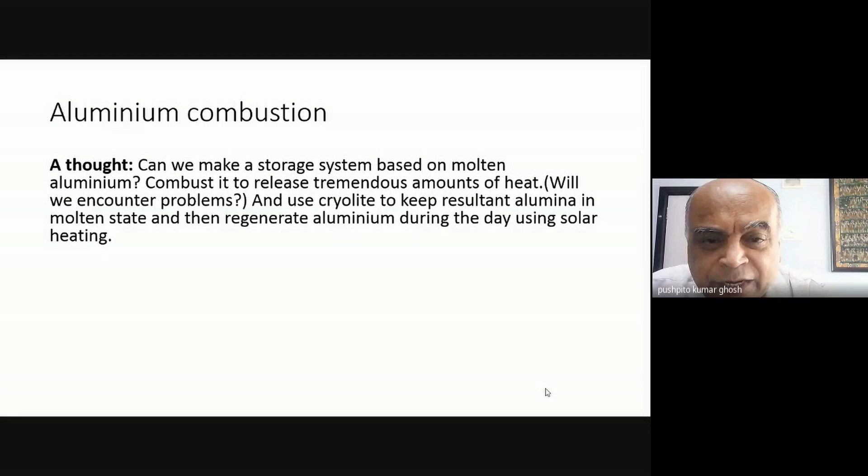So what I was doing was looking at this, you have seen this, this is the Hall Heroult process. And what are we making? We are converting alumina to aluminium.

At the same time, one interesting thing to consider is that in the future, one of the big problems will be that it requires a lot of energy. And so at some point, that energy is going to come from some other source. Maybe nuclear energy, maybe nuclear fusion, maybe solar thermal energy is possible. So there should be a concern about where this energy is going to come from, and not just for this. Across all of chemical technology, many processes are energy intensive, and where will this come from, and what role does a chemical engineer have in this entire debate on net zero, which people are talking about? Where do we all fit in? So I think that's important for you to know.

And second, if for example one is talking about solar energy, and not just solar but in many other cases, what we also have to look at is this whole business of being able to store energy, because you may not be able to utilize all the energy only during when it is being generated. Energy has to be stored. In a thermal power plant, of course there's no issue because you are constantly burning coal and generating power. But if you are working with, say, solar energy, you may be able to reach very high temperatures and carry out chemical processes. All that is fine, but one will have to look at storage.

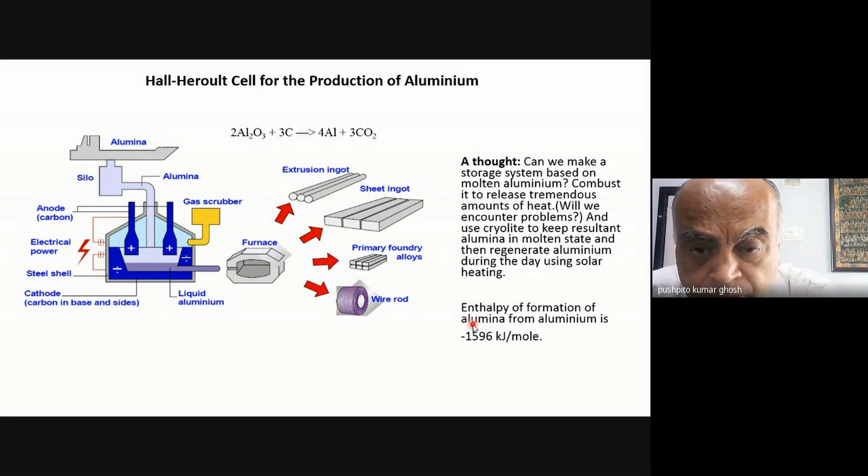This is just a wild thought, but the reason I'm sharing it is that you should always think about whatever you're learning, and where you can possibly apply it additionally. So keep this in mind, and later on, when we cover ammonia, you'll find something similar which we'll be discussing.

Now, what we'll do is discuss air, meaning separation of air. Air and water are two very, very important utilities which one requires.

Many times we take air for granted, but air is really not to be taken for granted. It's very important, so let us try and see what kind of things you have in air. Mainly, as you know, roughly about 4/5 is nitrogen and 1 part is oxygen. But air also has a fair amount of argon, something like 1%, and argon is a very important gas in its own right. There are, of course, small amounts of other things also.

This one is steadily going up - the carbon dioxide in the atmosphere. Today, as you know, it's about close to 412 ppm by volume, and it might go up further. So we have actually already crossed these limits.

But it's possible that later on you may actually want to recover carbon dioxide from the atmosphere. All this net zero is about the fact that if you are going to produce carbon dioxide, you must also find a way of taking it out - either through planting more trees and mopping up more CO2, which is frankly the easiest thing to do, or there could be certain technologies with which you can try and extract carbon dioxide from the atmosphere, to try and contain the temperature rise to 1.5 degrees centigrade, which is what everybody is talking about. So carbon dioxide from the atmosphere could become a feedstock in the future.

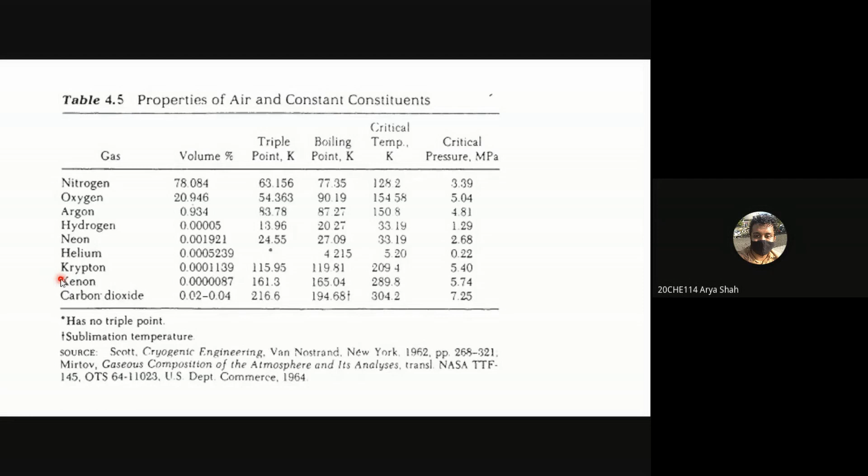So one more contribution to the hydrocarbons can be the vaporization that takes place at the pumps - like even for a minute amount of time that we keep our tanks open to fill the petrol or gasoline. Yeah, in fact, vaporization, it's a very good point.

Vaporization is an important point, but the biggest contributor to hydrocarbons is, of course, the fact that combustion is not 100% complete, and second, which you'll find a lot of times, you'll see these diesel fumes, and if the engine is not properly tuned, you see the amount of smoke and all that comes out - a lot of unburnt hydrocarbon.

But another source is actually cattle. I don't know if you know, but cattle are responsible for a huge amount of methane generation, and that methane really escapes. In fact, there's a lot of work in trying to reduce methane emission from cattle.

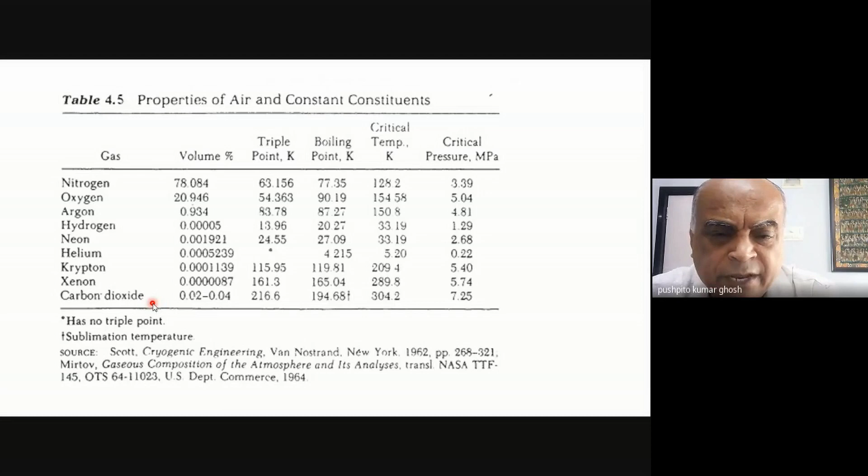I don't want to go into all those aspects, but just to basically say that there are complexities today which did not exist 300, 400 years back, and air is much more complex than what is shown in this chart.

Now, the other thing is that if you look at air, especially from a chemical engineer's point of view and in manufacturing, one doesn't realize the amount of air that we actually consume. For sulfuric acid, you require about 2.8 tons of air per ton of sulfuric acid. 1 ton of coal that we burn takes about 10 to 11 tons of air. The reason is because only 20% is oxygen.

So you're talking about something like 2 tons, and that will be about it. Now, 1 ton of coal will require about 2 tons of oxygen because you have CO2, right? And their atomic weights are comparable - oxygen is 16 and carbon is 12. So you can quickly do a mental sum, and you'll be able to figure out that these figures are all reliable. So it's a lot of oxygen, and in terms of air, and that's not all.

We don't take into account the fact that we are 1.3 billion people, maybe 1.4 now. Can you imagine everybody consuming food, breathing in oxygen and breathing out carbon dioxide? How much carbon dioxide is actually going into the atmosphere from us? And for each human being, count the number of other animals that exist on the planet, and they are all emitting CO2. So it's not just chemicals manufactured, but us. You can look at the calorific value of food, and obviously it will be an approximation, but you'll get an idea within maybe plus minus 30% of how much oxygen would have got depleted and how much carbon dioxide would have been produced from us.

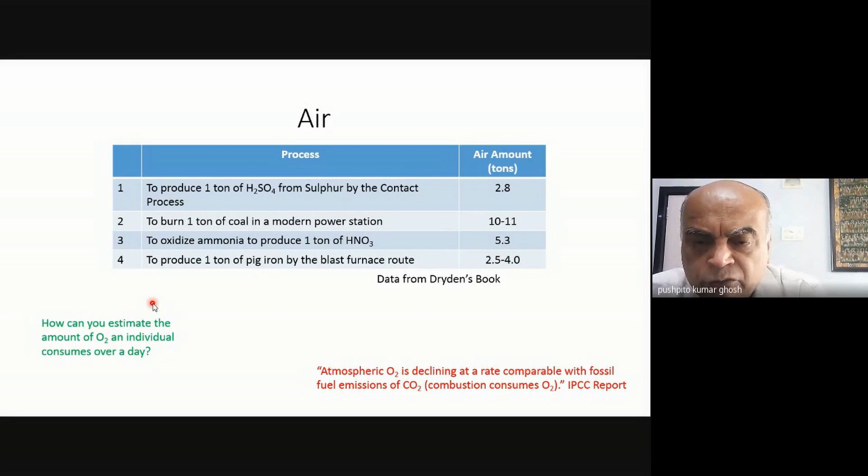Now, what we will be looking at over the next couple of lectures is the separation of air into oxygen, nitrogen, and argon. Why? Because many applications actually require pure oxygen, so you'll have to look at that. There's a lot of requirement of pure nitrogen, and a lot of requirement of pure oxygen.

But then you can imagine that if you've got a lot of unburnt hydrocarbon in the atmosphere, and if something happens, like if I produce pure oxygen, liquid oxygen, and a lot of the hydrocarbon in the atmosphere dissolves in that oxygen, there could be an explosion. There's a lot of things that you need to look at, and I'm just trying to point out a few things which are rather obvious.

And then, many times we know that if you are using air and there are impurities like SOx and NOx, which can make the medium where you're carrying out a reaction acidic, there could be problems. So again, they have to be removed. And then we also know that there are many applications where you actually require dry air, not just wet air. So the moisture content in air is also very critical for many applications. These are all the things that one needs to keep in mind.

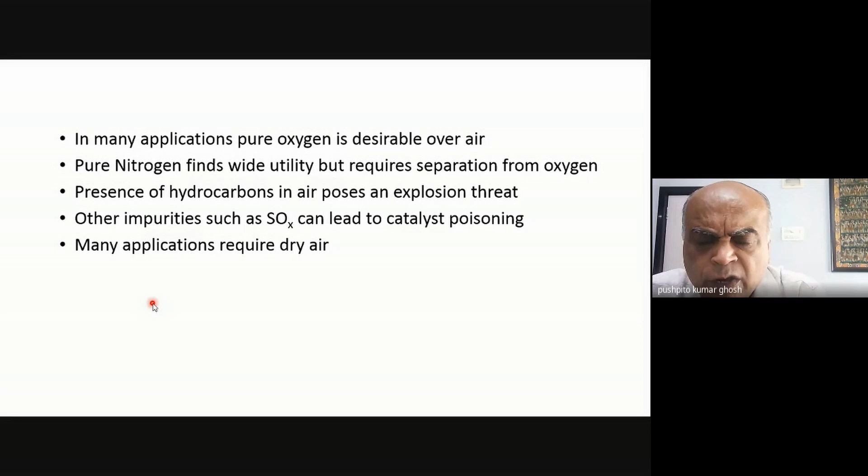Now, let us look at oxygen first. We know oxygen has a lot of applications. There was a time, when people were discovering oxygen, and the great work of Lavoisier, that oxygen was being used for combustion, and finally all the oxygen in the air got consumed, and they didn't know, and they would call it burnt air - that is, it's exhausted of its vitality, and it's burnt air. That was the term that was used after combustion.

Where would one need pure oxygen? Which are the applications? Sir, in steel plants. Steel plants, okay. So oxygen cylinders. There you go. For hospitals and all? Yes, hospitals, sir. Oxygen cylinders. So for underwater divers as well, for hospitals, underwater divers. Very good. Anything else?

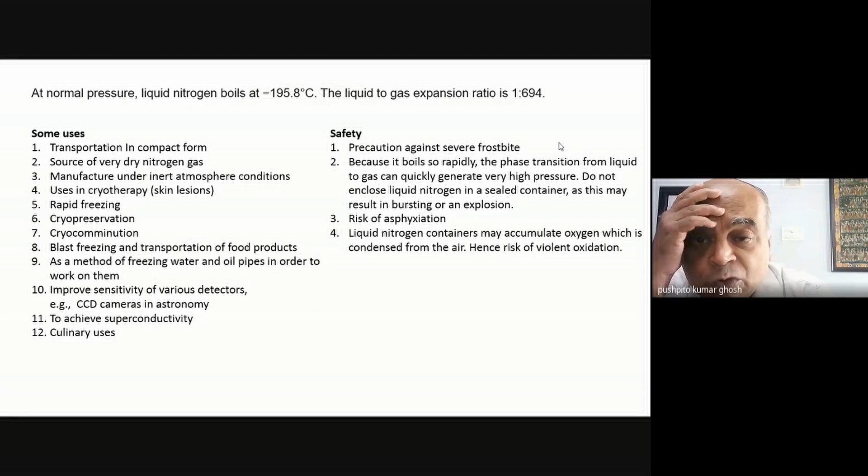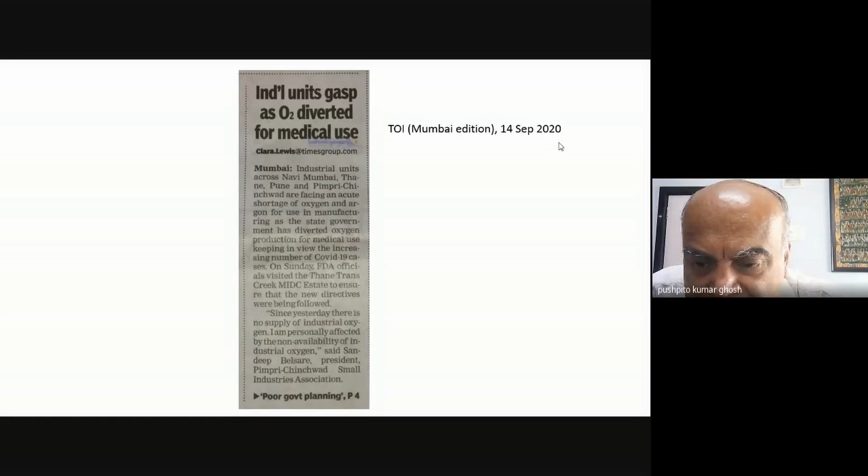Now let's also look at nitrogen. Where do you require nitrogen? For packaging food. Let's put that down. For fertilizers - let's put that aside, I'll take it later. You said packaging? To preserve the food, they fill nitrogen in the packet.

In fact, it's quite common today - you look at your Lay's potato chips and they look like a balloon. Many times they just put in some nitrogen and pack it with that, just so that the potato chips don't get rancid. So yes, packaging is one.

Anything else? Making dyes? Yes, but pure nitrogen - where? In compound? No, I'm talking about pure nitrogen, meaning N2, not compounds that contain nitrogen. So nitrogen fixation - probably one of the biggest. Nitrogen fixation, you cannot have oxygen there.

To provide an inert atmosphere for metallurgical operations. Yes, inert atmosphere, that's what you're trying to say? Yes, sir. Right, great, what else?

In vehicle tires. Yeah, I mean, you don't want any kind of degradation of the polymer. Not the majority of vehicles though, they just use air. So as a refrigerant or coolant, liquid nitrogen. Brilliant - as refrigerant, coolant. Brilliant.

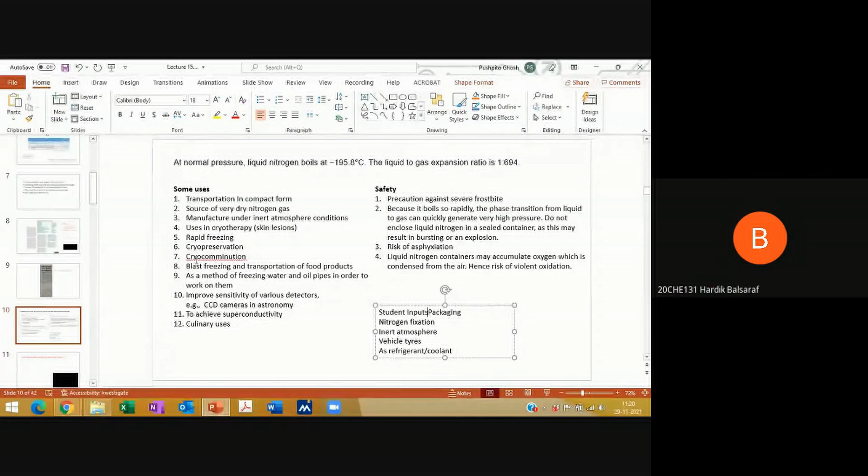So freeze it and grind, sir. Yes, correct. And why freeze it? Because you want to go below the glass transition temperature, because then it will be like a solid, otherwise a rubbery material is very difficult to grind.

This is a very important area. People don't realize many of the ion exchange resins, which are in a very fine powder form, those resins have to be actually comminuted. Cryocomminution is a very interesting process.

Then we don't realize all this talk about trains which will run with magnetic levitation. Today, the temperature at which you are able to get superconductivity, earlier it was liquid helium temperature, but today there are materials which are superconducting at liquid nitrogen temperature. Nobody really has been able to make anything superconducting at room temperature, although there have been many such false claims, but invariably they have been proved wrong. The last big breakthrough was really bringing it to the liquid nitrogen temperature, which was itself a huge finding.

In fact, we also know that, for example, signal to noise ratio - one of the best ways to improve the signal to noise ratio is really to operate at lower temperatures. So when you have extremely sensitive detectors, like some of the CCD cameras used in astronomy or in doing X-ray crystallography, these are all cooled detectors. Many times you have to cool it to liquid nitrogen temperature.

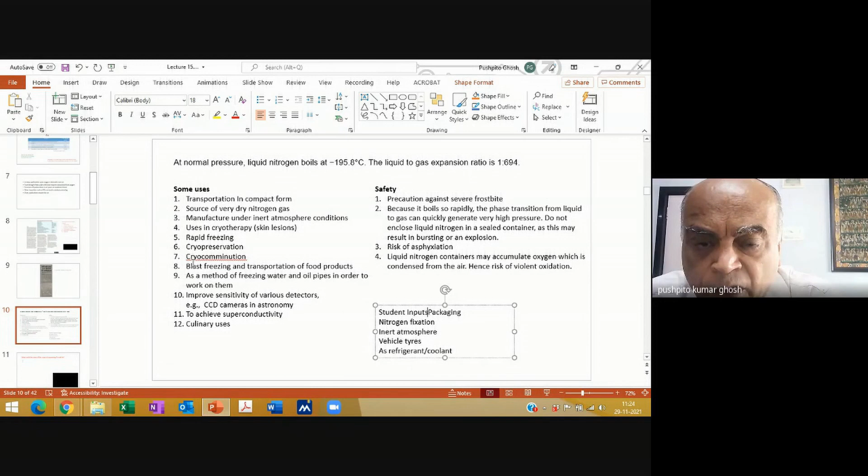Look at this air business in a broader way, and then it gets quite interesting. Let me ask you, what would be some of the ways of separating oxygen and nitrogen?

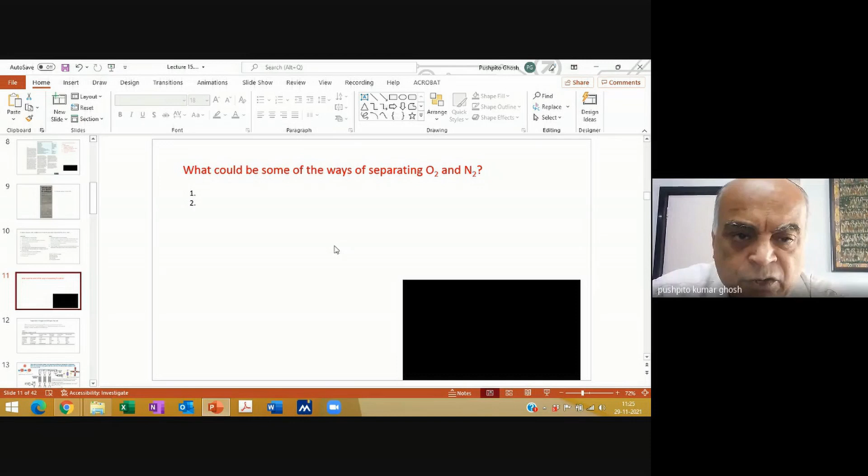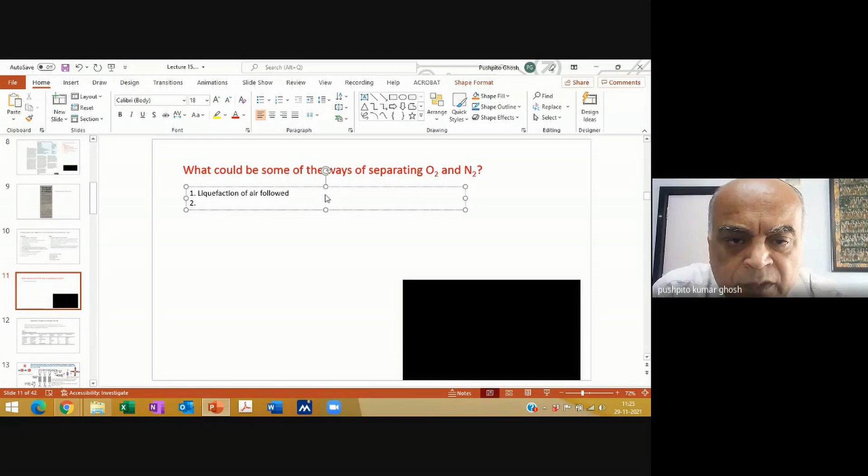So, fractional distillation of air. Very good. Which means that first you have to liquefy air, right? Yes, sir. So we are talking about liquefaction of air followed by fractional distillation, right? Yes, sir. What else? Any other way of separating?

So can we use any magnetic principles? I think what you have in mind is that oxygen is paramagnetic. Yes, sir, that's what you're trying to say - drawing on paramagnetism of O2. Anything else? So passing through pyrogallol solution so that oxygen is... Brilliant.

Passing through... okay, which means you're talking about selective dissolution. Is that what you're talking about? Yes, sir. Okay, great. Anything else?

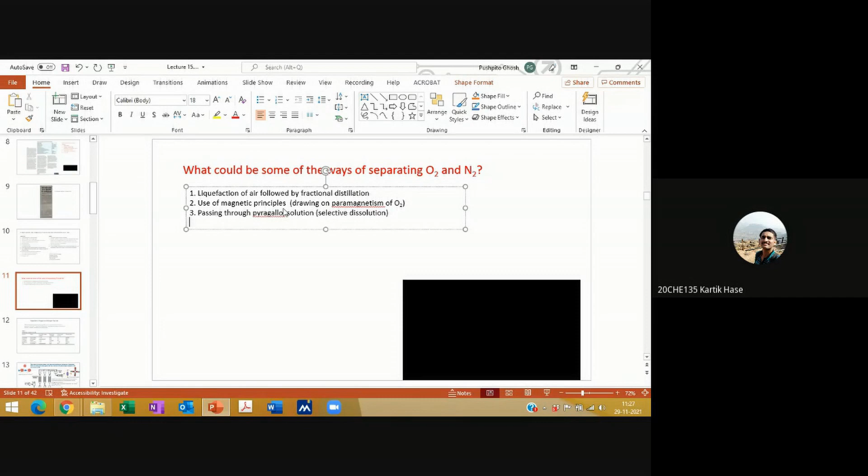Sir, is there any way so that only oxygen reacts in a chemical reaction and then we can recover it later? All combustion processes, and then we can recover it later. If we use mercury in this particular process, then it will form HgO, and then if we reheat it, then oxygen will be released from that compound.

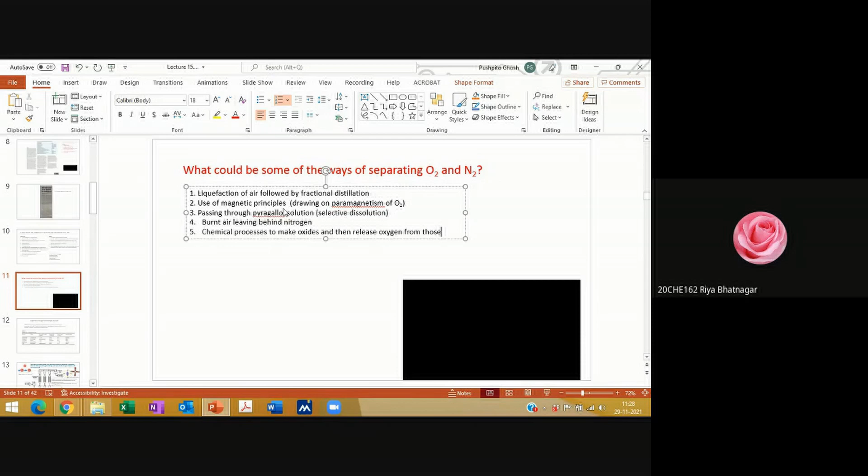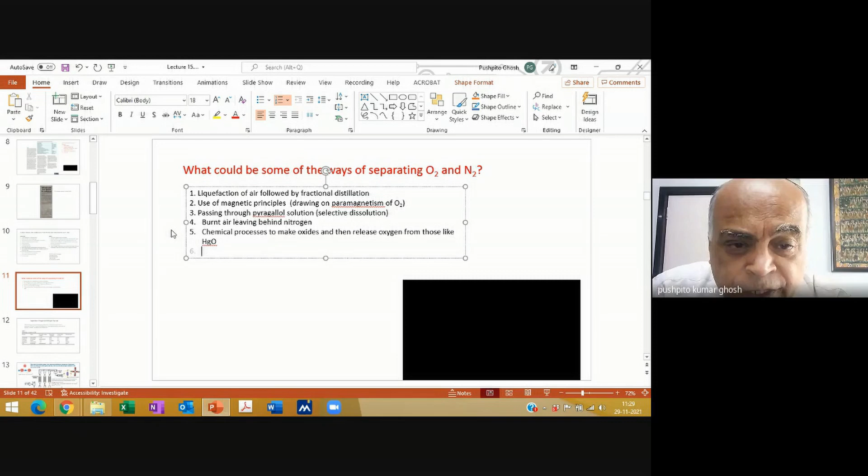So what you're saying is that chemical processes to make oxides and then release oxygen from those, right? Yes. That's what you mean, isn't it? Like HgO, that's what you're trying to say. Correct? Yes, sir. I would say 4 and 5 have some commonality. No, except that 4 would be useful for nitrogen and 5 would be useful for oxygen.

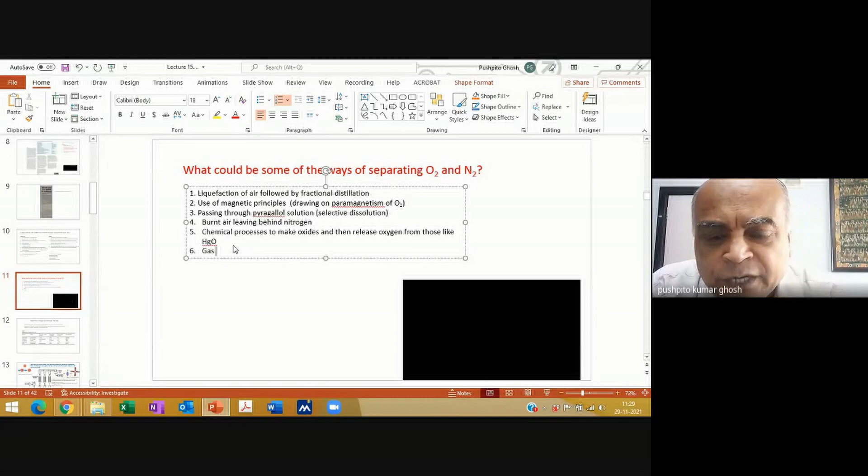So using gas chromatography? Gas chromatography, very good. Actually, you can separate nitrogen and oxygen with adsorbents. So gas chromatography - I will say generalize to the principle of adsorption. Try to always give the more generalized principle. Anything else? I think you've given some very good answers, but I was just hoping maybe one or two more.

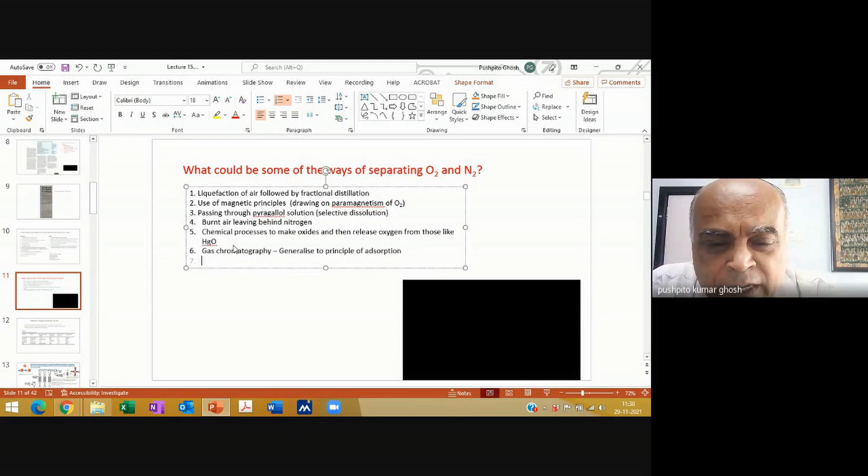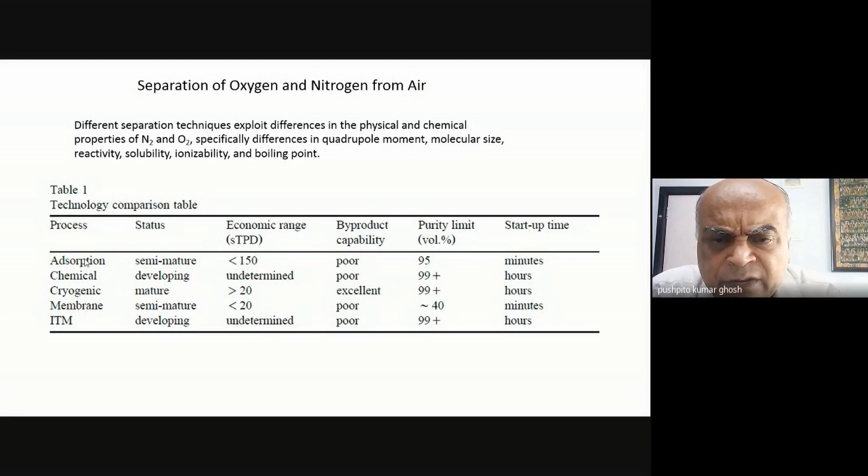You talked about adsorption, that is great. You talked about gas chromatography. It's true, you can separate oxygen and nitrogen by GC. Now, what is more commonly used are zeolites, especially some of the zeolites like zeolite A has been used. In fact, my colleagues in the previous place where I was, they had developed this sort of a unit long time back, 1999, 2000, and these units are quite popular today, all over.

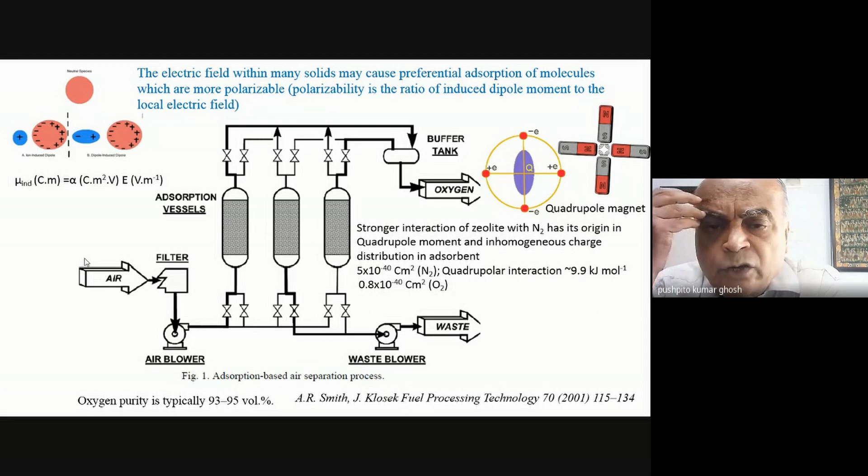When you talk about O2 and N2, while of course oxygen is more reactive than N2, that's really not the basis of adsorption, it's a bit different. What's the dipole moment of nitrogen and oxygen? Zero, zero. Perfect. So they don't have any permanent dipole moment, but there is a polarizability of these molecules, O2 and N2. If you were to put them in an electric field, it would induce a dipole. That's what is meant by polarizability of a molecule, the extent to which the dipole is induced, the magnitude of the dipole moment divided by the electric field. This is what again creates the dispersion forces. Some of the van der Waals interactions arise from this kind of induced dipoles, from polarizability. The properties of nitrogen and oxygen in that sense are quite different.

Suppose I've got a neutral molecule, but now suppose I put a charge in the vicinity of the molecule, it will induce a distortion of the electron cloud, and the electrons would tend to move towards this. Or if you have got a dipole, then this is the way it will happen. So I have basically induced a dipole. And now what happens is that I've induced a dipole, and I'm in a way forcing the molecule to interact with me because of the induced change that I have brought about. That's what happens in, let's say, in a zeolite, in these cavities.

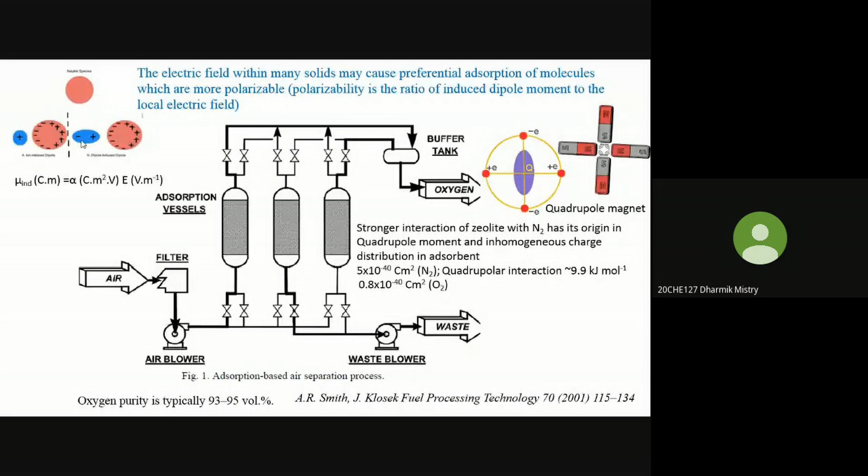What you have is that firstly, it is known that you have a very non-uniform electric field. You know that there are mobile cations in a zeolite, plus of course you've got stationary charges which are negative. So what happens is that it's been found that the interaction of O2 and N2 with zeolites tends to be very different. Which would you expect to interact more? N2. Wonderful. I can write that the induced dipole moment is basically equal to the polarizability multiplied by the electric field. So if you were to multiply, then you'll end up with Coulomb meter, which is basically the unit of dipole. So that's the polarizability unit.

Now, polarizability is related to also what is known as the quadrupole moment. So all these molecules, which otherwise have zero dipole moment, can actually have an induced dipole moment. And what I'm talking about is what is known as the quadrupole moment. Quadrupole moment is, like, I can have, say, two molecules which are anti-parallel to each other, not fully aligned.

Maybe they would have a phase shift in the way they are interacting with one another. So all of those things can give you what is known as a quadrupolar moment.

It's better to understand it through a magnetic pole. If I have a single magnet, I can have a north pole and a south pole. Now I can have an arrangement where I have a north pole and a south pole, so this will be interacting. If I have south and south, they will be repelling. And again I have a north and south here, so the lines of force will go like this, like this, like this.

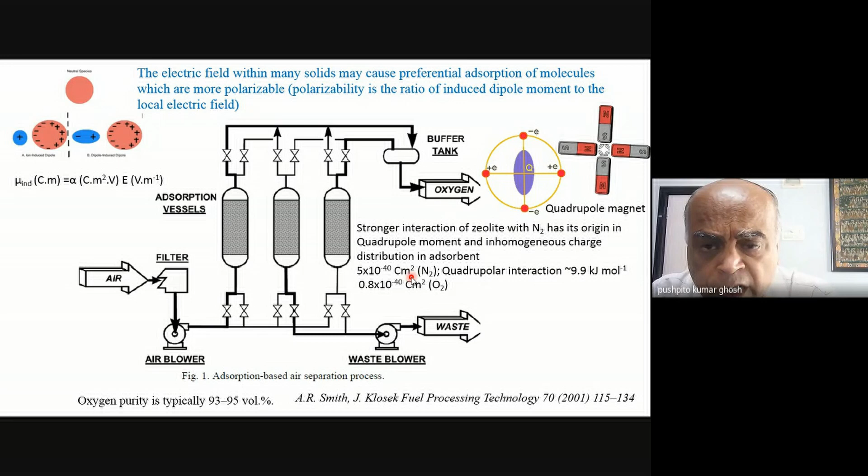It's also important that in these kinds of units, you start getting your product, like your oxygen, right away. You don't really have to wait. Like if you're putting someone on a machine, you have to supply the oxygen quickly for medical use and things like that. So these units are very good from that point of view, that straight away you can get your oxygen. And make a note that it is better basically as a way of enriching oxygen.

You're not really making use of the nitrogen. Now, this is another way where you're really doing it by solubility. So it could be something like you're mentioning about pyrogallol. But the commercial unit which is there actually makes use of molten salts. So you take a eutectic of maybe sodium nitrate, sodium nitrite, that kind of a salt mixture which can form a lower melting eutectic.

At a particular temperature, like 900 to 1200 degrees Fahrenheit, oxygen has high solubility in this molten salt. What you do is take it from this bed into what's known as an absorber, because you're absorbing the oxygen, and then take it to a desorption unit where you heat it up to higher temperatures. At those higher temperatures, the oxygen loses its affinity for the molten salt, and you can take out the oxygen. So this is the desorber and this is the absorber, and after the oxygen has been removed, you put it back into this unit.

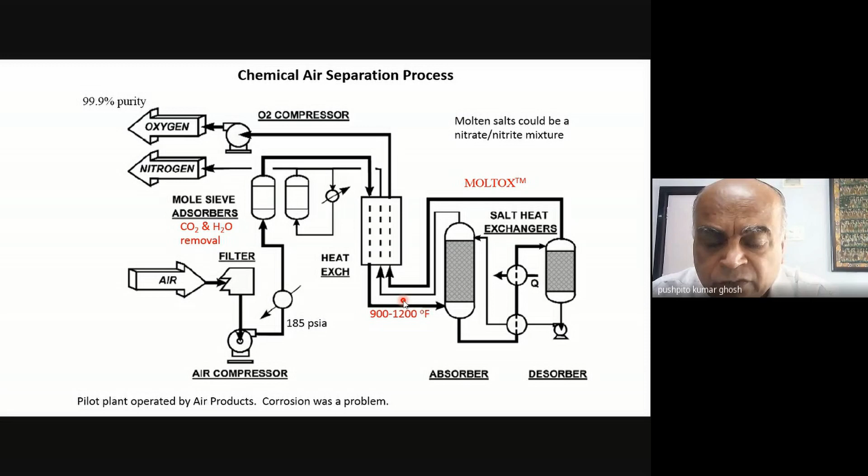Now this one is based on size difference. These are membrane modules - it could be a hollow fiber membrane or a flat sheet membrane. These membranes have a certain porosity, and because the oxygen molecule has a marginally smaller size - about 2.96 angstrom effective spherical radius, while nitrogen is about 3.16 angstrom - that translates to about 3 to 4 times higher permeability of oxygen through these membranes.

So I can therefore permeate oxygen selectively, and you might be able to reach purities of around 50, 60, 70% oxygen, which is not bad - especially because this is a very low cost, very affordable unit.

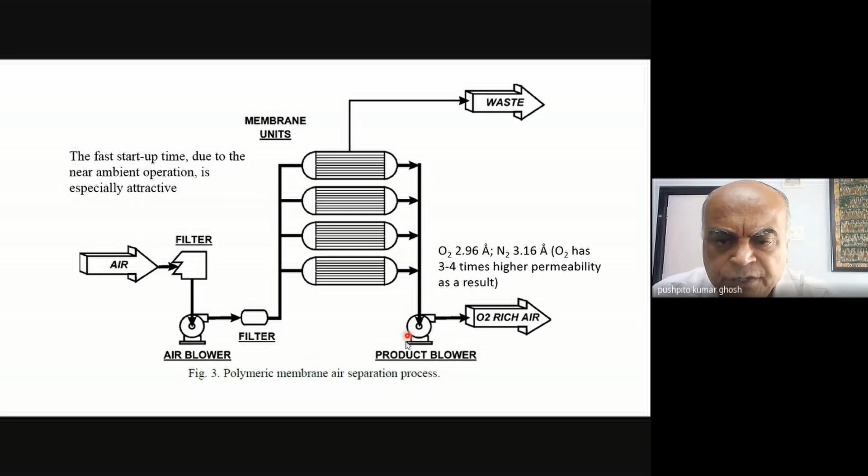This one takes advantage of the greater ionizability of O2 compared to N2. It's because, as we discussed, you have unpaired electrons in the antibonding orbital, so it's easy to kick off at least one of these electrons and form O2 plus. But this is not something that happens at low temperatures. Typically you require high temperature, something like maybe 1100 degrees Fahrenheit, to pull off the electron.

What it actually does is use these modules, which are ceramic membranes. You have to use ceramic membranes because polymeric membranes would not withstand these kinds of temperatures, whereas ceramic membranes will. These ceramic membranes are ion transport membranes. Applying an electric field across these membranes under those temperatures, the O2 becomes O2 plus, and then the O2 plus permeates to this side because of the electric field. The electron which you lost at this point can flow into the other side, and at the permeate end, your O2 plus can again become O2.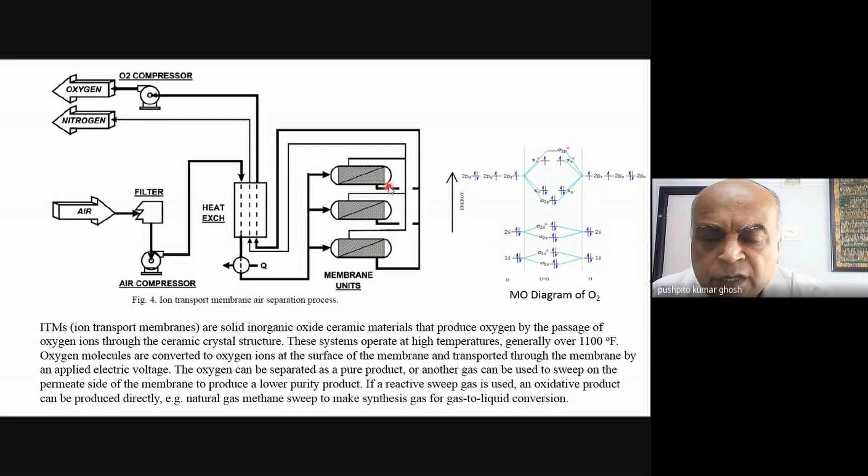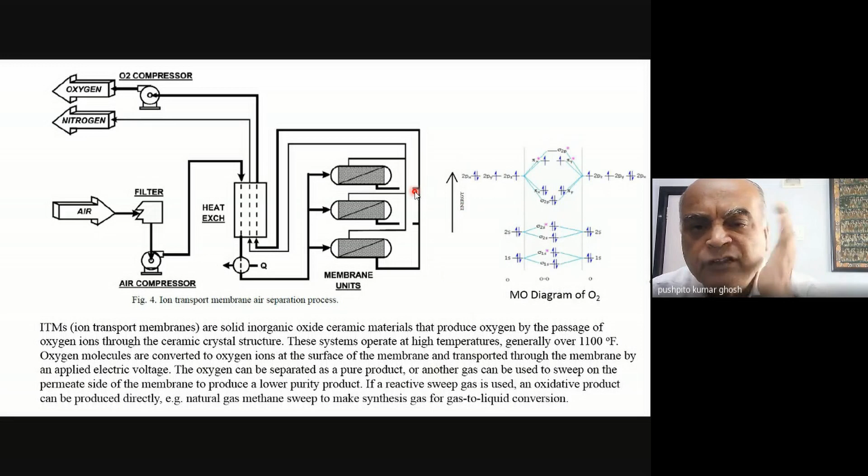There are also people who have been looking at sweeping out that oxygen with something like natural gas, methane. So natural gas and oxygen react to form syngas. Why would you do this? Because you have to generate the syngas at high pressure, and if you had a huge amount of nitrogen, the partial pressure of nitrogen would be high. This means you would have to pressurize these things to much higher levels to achieve the required partial pressures of oxygen and natural gas. So getting rid of the nitrogen helps you have a more reasonable pressure for converting it into syngas. Those are the reasons why you would want to get rid of the nitrogen in this particular case.

When I was looking at all of those methods, I realized there is a very fundamental process used today that is not even covered in those approaches. I was looking up this Alibaba site. This unit, for example, does water electrolysis. It costs about $1,000 to $3,000, and it gives you extremely pure oxygen, 99.999%. They didn't actually say what mechanism they use to get pure oxygen, but from the description of the unit I tried to write it down in terms of half cell reactions that take place, and I believe this is what happens.

I'm not 100% sure, but I think I'm okay. I was right, probably.

Now, what you're doing is quite interesting. You take air at the cathode, and of course you're reducing the oxygen in the air, not the nitrogen. Obviously nothing happens to the nitrogen, it's not reactive. So the reaction happening is O2 plus 2H2O plus 4 electrons coming from the anode, and you make 4 OH minus.

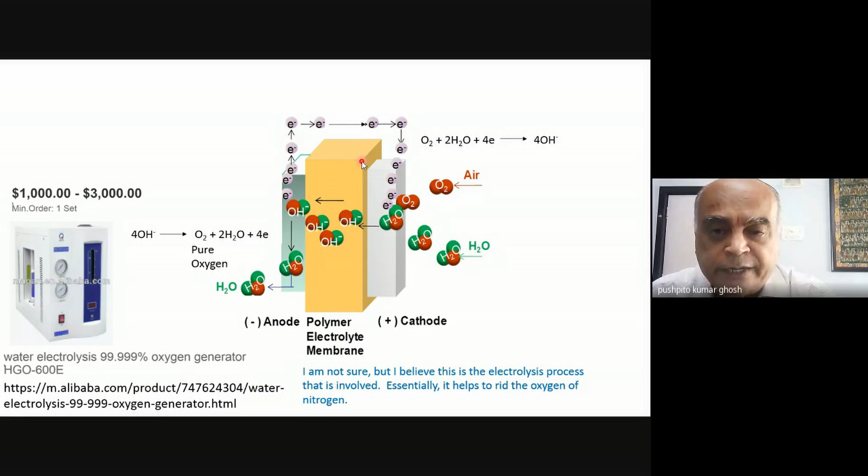Yes sir. Thank you, sir.

We've looked at various methods. See, all of these are good for small units or things where you don't need very high purity of oxygen and nitrogen, and even if you get one of those pure, the other one is impure. Now what we'll discuss is how to get both oxygen and nitrogen in a pure form.

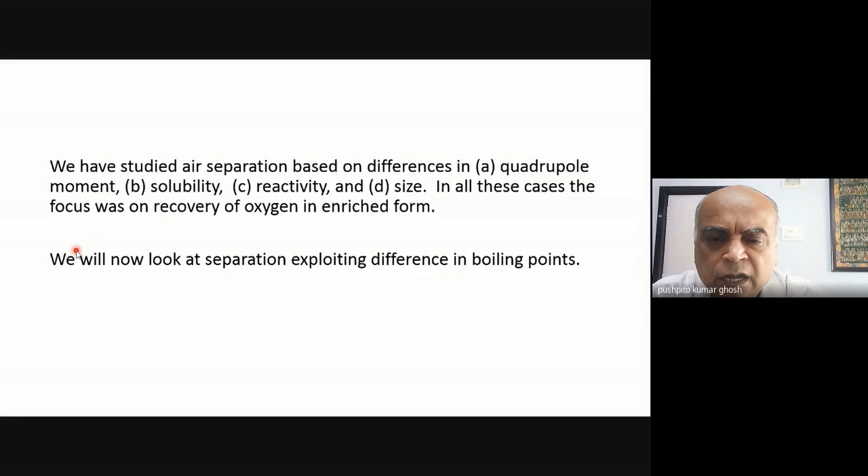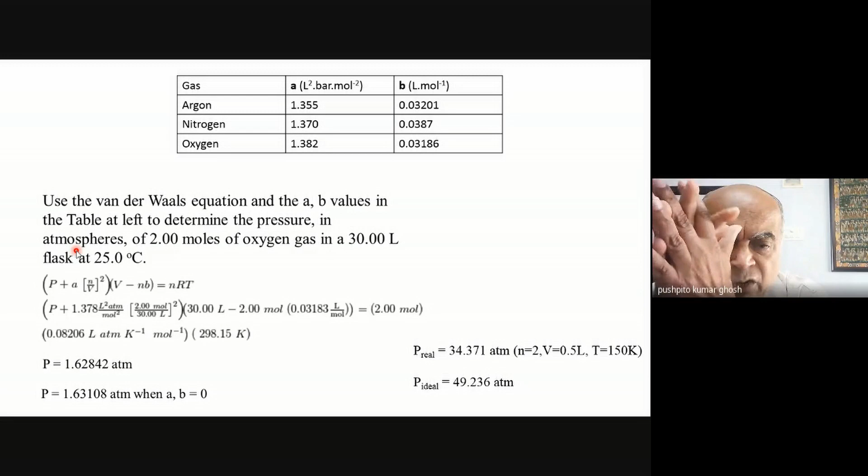We will look at how the boiling point differences have been exploited. Suppose I take air or oxygen and cool it down, with a certain pressure, temperature and moles of gas, I know the ideal gas equation is PV equals nRT. But we also know that gases like oxygen and nitrogen are not ideal gases. They're non-ideal because there is attraction among the molecules of the gas, and also because they have a finite size. So for example, if I try to increase the pressure beyond their intermolecular distance, things like the Lennard-Jones potential will become important, and there will be a massive rise in the energy of the system.

So those are the two terms, the A term and the B term. The B term is the size term which I have to take into account. This size is negligible when the volume is large, but as I reduce the volume of my container and make it very small, by pressurizing the system, this factor becomes important. Suppose I've got a gas with 2 moles of oxygen and 30 liters of volume in my flask, and let's say my temperature is 298 K, 25 degrees C.

Can you calculate the pressures considering the ideal gas, that is PV equals nRT, and also using the equation for the non-ideal gas, where A and B have these values: A is 1.378 liter-squared atmosphere per mole-squared, and B is 0.03183 liter per mole. These are a bit different from the values shown here, but don't worry about it. Do the calculation and see if you get this pressure for the ideal gas, and this pressure for the non-ideal case. Use R as 0.08206, T as 298.15 K, and N is given. Yes sir, the values are correct.

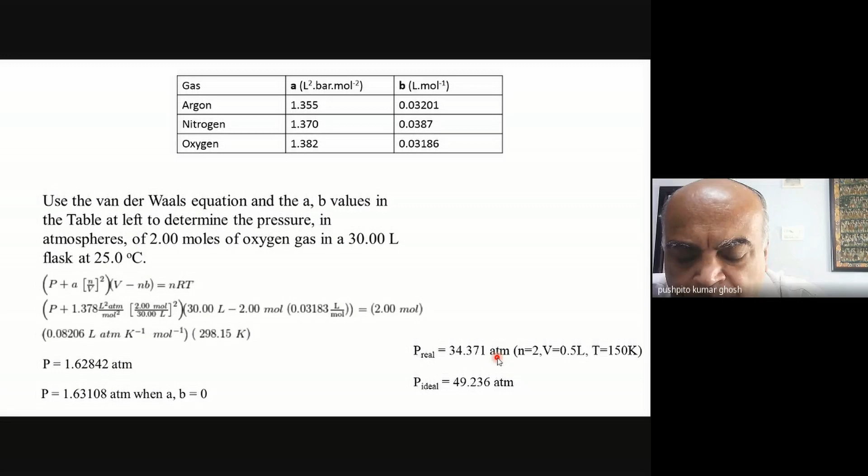Can someone tell me why this pressure is so much lower in this particular case? In the ideal case, we don't consider the interaction between gas molecules. Brilliant. So you can see for yourself, and that's why I wanted you to do the calculation.

When we talk about pressure, it is the rate of collisions with the walls of the vessel. As you reduce the volume, the molecules interact with each other, so the number of collisions with the wall goes down, substituted by more interactions between themselves. This is the reason for the deviation.

Now, under these conditions of volume, we still haven't come anywhere near the situation where repulsive interactions would be high because of the size of the oxygen molecules. That size component is still only a tiny fraction of the total volume of the vessel. So effectively what you have is really the effect of the attraction term, which is leading to reduced number of collisions with the wall.